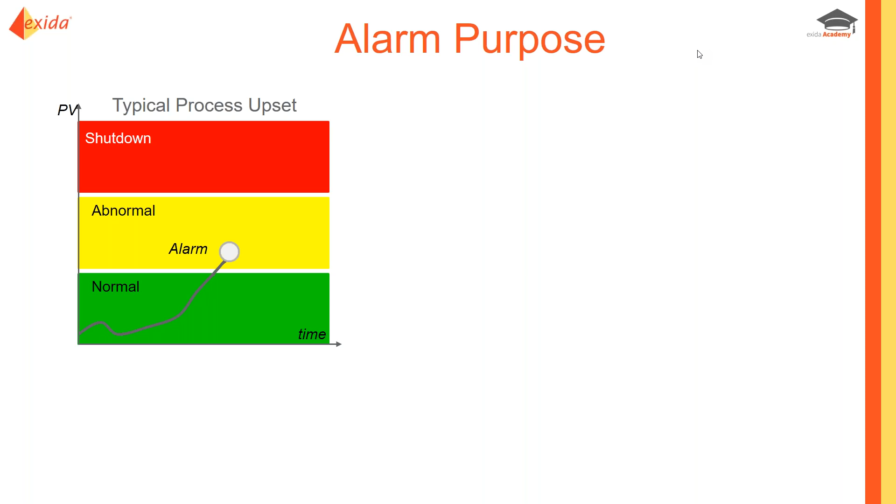Let's start with a discussion of what the purpose of an alarm is. In general, the process automation system will keep the process in the normal operating range, and at certain points when it gets outside of that range, we'll call it the abnormal situation area, that's when we need an alarm. And we want that alarm to go off to tell the operator, hey, I need your attention, I need you to take corrective action, and I need you to take that action relatively quickly to prevent an impending consequence. If the operator does that and performs the corrective action appropriately, then the process will turn around and go back from the abnormal situation area into the normal operating range, and the alarm will clear.

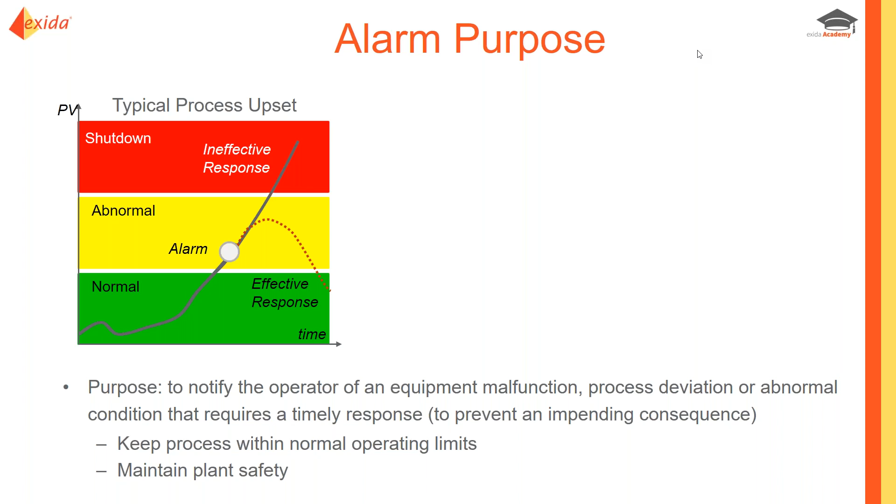If, however, the operator does not respond effectively, the process variable will continue to escalate until a consequence occurs, such as a shutdown of the safety system. So the purposes of an alarm also include keeping the process within normal operating limits. That would be keeping it in the green zone. And another way to think of it is alarms are also there to keep the process out of the red zone, out of the shutdown zone. Now, the scenario that we talked about with an alarm, it occurs, the operator responds to it, the process is corrected, the alarm clears. That's the way it's supposed to work.

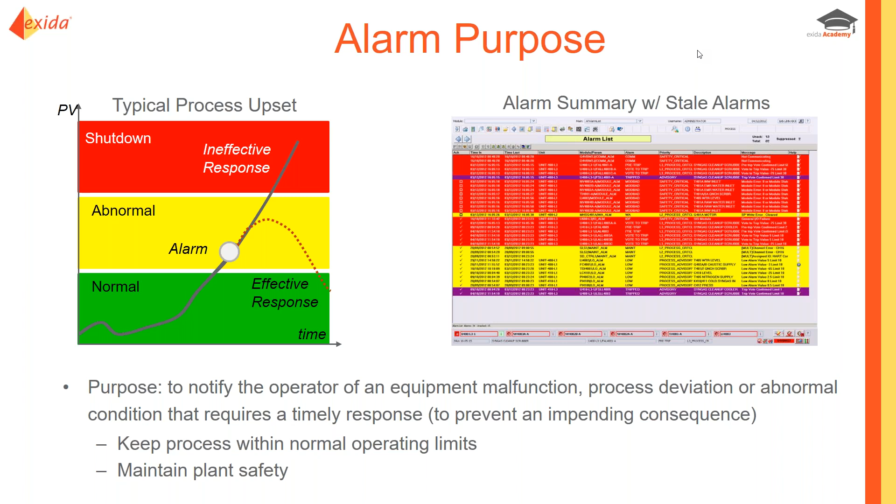But if you go into your typical control room and we look at the alarm summary display, we'll often see tens to hundreds of alarms displayed that scroll down and fill the page with alarms. And they may have been there for days, weeks, or months. So they're obviously not following the purpose of what an alarm is supposed to do. That's an example of a stale alarm, which gets in the way of the operator. Stale alarm is just one type of alarm management issue. Let's look at a couple more. We would be concerned about operators getting too many alarms, whether it's a steady state scenario or whether it's after an upset, and we'll call that an alarm flood.

We also should be concerned about nuisance alarms, alarms that are presented to the operator where they don't need to respond for one reason or another. Stale alarm is one example of a nuisance alarm. And then scenarios where the alarm priority is not meaningful in helping the operator understand the relative importance. If you have these kinds of problems in your system, then unfortunately you are robbing the operator of an effective tool or an important tool to help them do their job. The alarm system is critical for the operator to be able to do the best job that they possibly can.

Let's take a look at part of why that is. The key to operators performing well is to maximize their situation awareness. So what is situation awareness? It's the ability to take the external cues of what is happening in the process, including alarms, and understand what they mean now via the mental model, the understanding of the process. So what those cues mean now, and what they will mean in the future, or what that means to what is going to happen in the future.

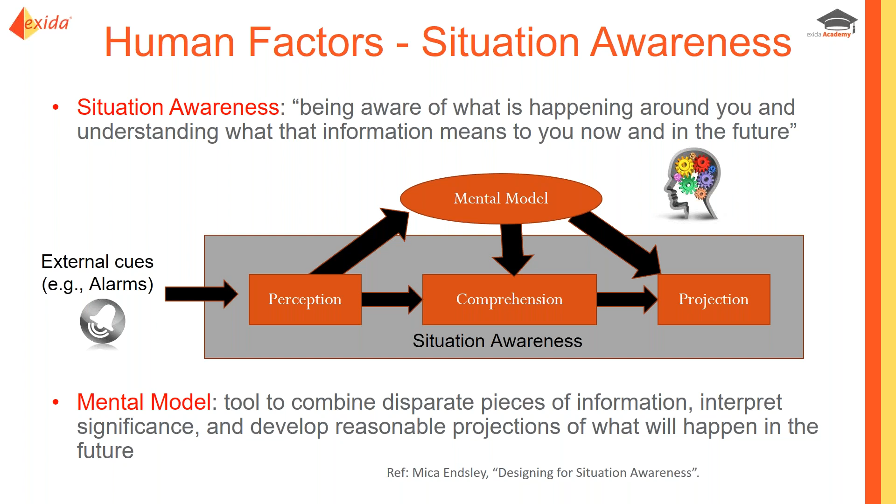So you can imagine that if these cues are false alarms, or are not meaningful, or mean the wrong or incorrect things, what's going to happen to the operator's situation awareness? It's really going to be compromised. And it will be very difficult for them to truly understand what is happening with the process, to do the best that they can, and to not make mistakes, frankly. If they're getting incorrect signals as to what is happening in the process, it's not hard to see that they might make a mistake because they've been given false information.

Another element that I wanted to point out and talk about were alarm floods. This is a scenario where the operator gets more than 10 alarms in 10 minutes, so it's a very difficult and challenging situation. That's generally speaking too many alarms to be able to respond to on a consistent basis. So it is very possible that the operator may get so many alarms that they can't understand and respond and process them all. So they could very easily miss one or more of those alarms, and if they were critical, it could ultimately lead to a shutdown or some form of consequence.

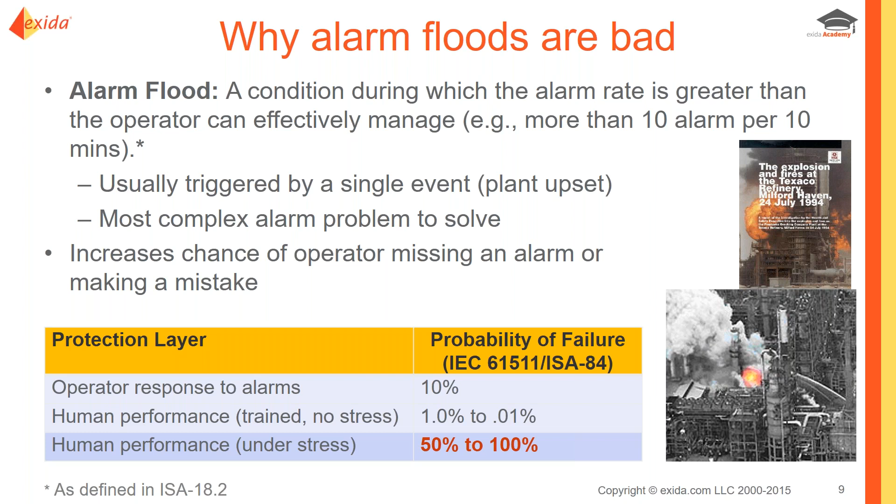So that's why we want to launch into an alarm management program. Now, the guidance for that program will be the standards on alarm management. In the US, the relevant standard is the ISA 18.2 standard, first released in 2009, updated in 2016. It was actually used as the basis of the international version of the standard, IEC 62682. Now, the two documents are very similar. I would say 80 to 90% of the content is the same. They both contain requirements and recommendations for what needs to be done.

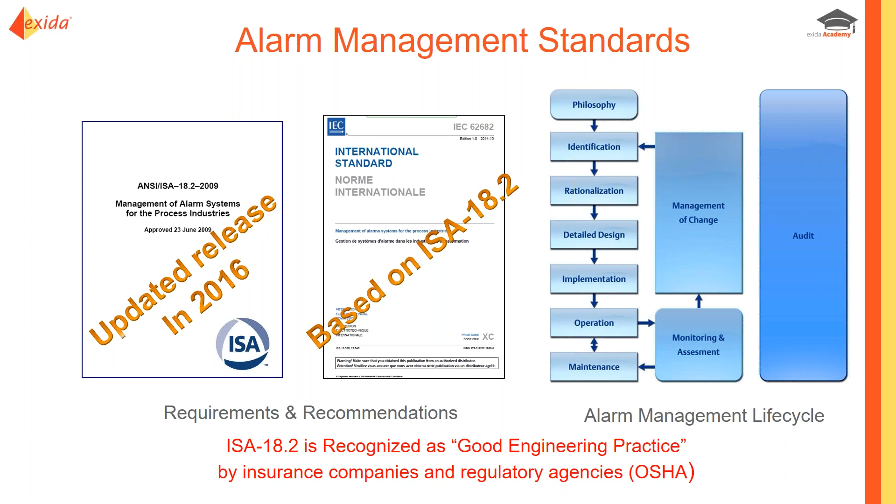They both contain the same alarm management life cycle, and that's what we see here on the right-hand side. This is essentially the alarm workflow practice. And what we're going to do is to essentially create an alarm management program out of that alarm management life cycle, or that conforms to that alarm management life cycle. We will use that as the basis. One of the other things that the standards do is they define the definition of an alarm, or the criteria for what an alarm is supposed to be. So let's look at that.

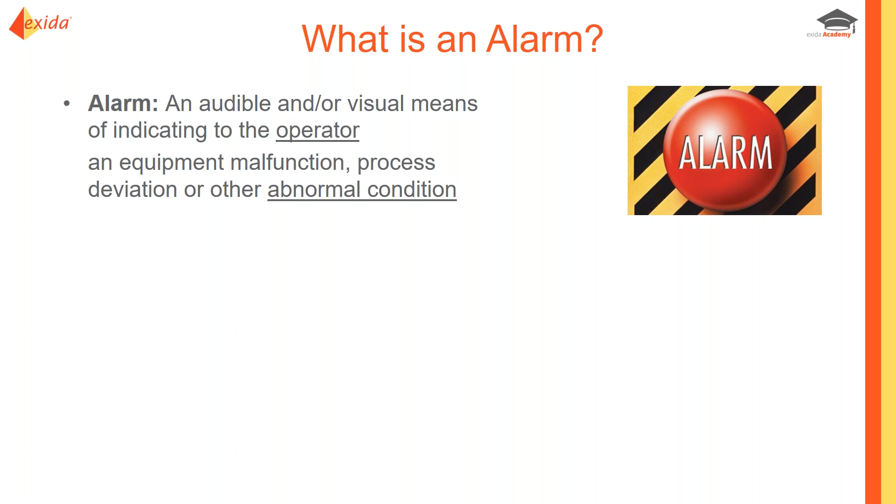An alarm is supposed to be an audible and/or visual means of indicating to the operator, and I've underlined the word operator to point out that the operator is the target audience for the alarm system. Second part of the definition is that an alarm needs to indicate an equipment malfunction, process deviation, or other abnormal condition. I have the word abnormal condition underlined to indicate that an alarm is supposed to indicate that something is wrong, something unexpected has happened.

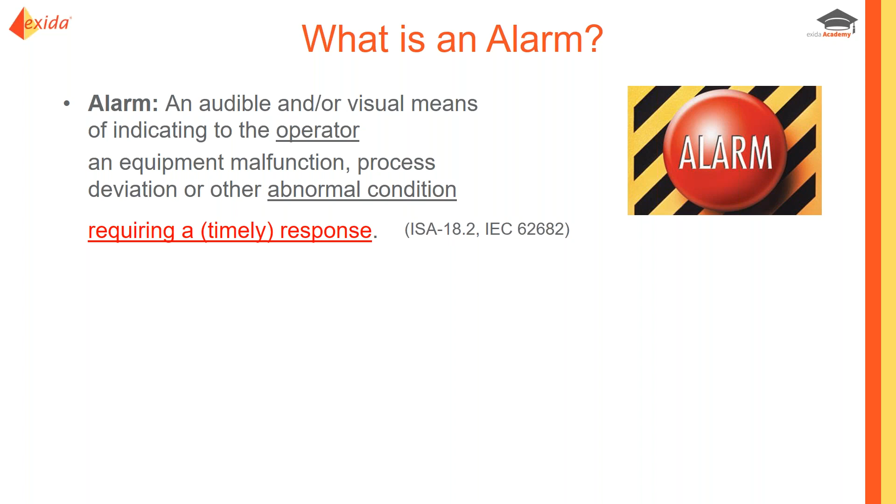And then last but not least, an alarm requires a timely response. More than acknowledging the alarm or silencing the horn, we're talking about opening a valve, turning on a pump, something that will actually correct the process abnormality. Now, there's a process that we're going to talk about in a little bit called alarm rationalization, and that's essentially the review of the alarms that you have configured or that you propose to make sure that they all conform with this definition. If you have an alarm system that has performance issues, it is likely because many of the alarms do not meet this criteria or this definition that we see here.

Now, one of the other reasons why folks have alarm management issues is they oftentimes use the alarm system to communicate everything that the operator needs to know, whether it's a true alarm or not. Part of what we want to do from a human factors point of view is to make it so that the alarm summary display, which is used for display of the alarms, contains only true alarm conditions, something that requires operator action and represents an abnormal situation. Now, that's not to say that these other types of notifications, alerts and prompts and messages and status indications, are not important. They are important as well, but alarms are more important.

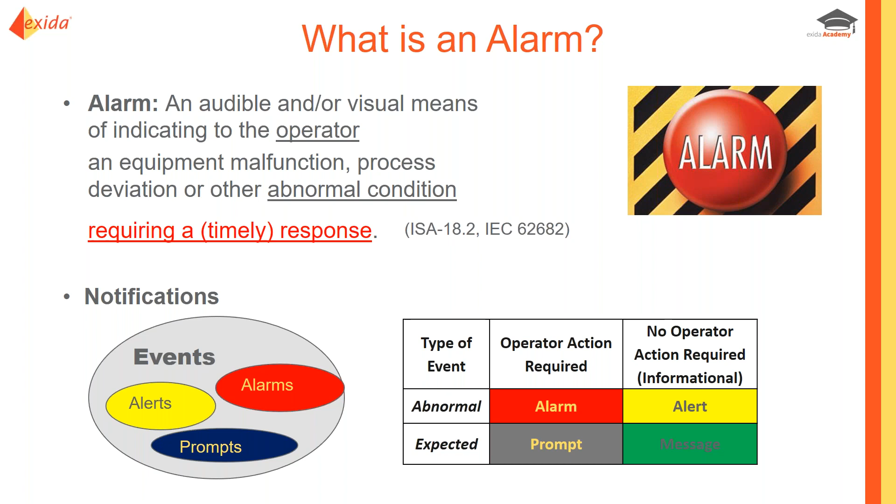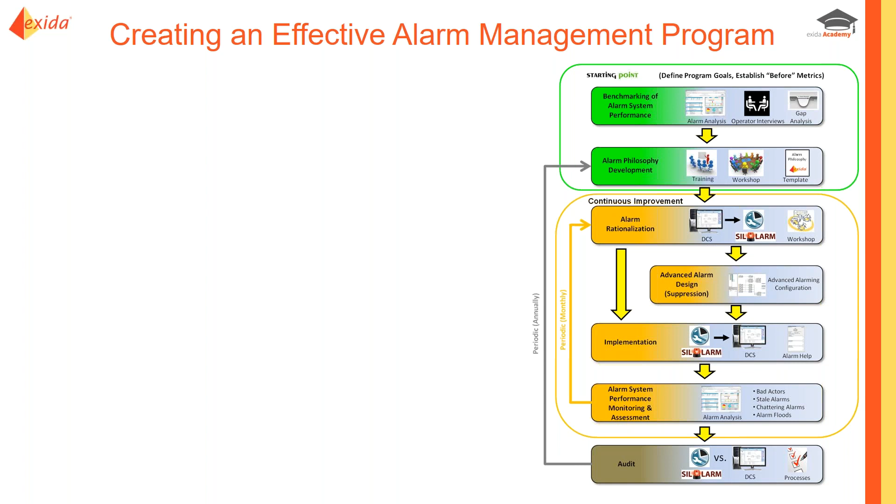So now let's turn our attention to how do we create that effective alarm management program. We saw the alarm management life cycle. Sometimes it can be a little confusing or challenging for folks to know where do I start or how do I drive action from that. So what we've done is kind of simplified it to create a 7-step process. The first step is to actually benchmark your initial performance. And that actually consists of, or is the same as performing the monitoring assessment step and the audit step of the alarm management lifecycle. But during this step of our 7-step process, we are measuring the alarm system performance to see how many alarms the operators are actually getting, how many nuisance alarms, that kind of thing.

We're also doing interviews to find out how well the alarm system works for the operator, and then we'll use that information to help us create an alarm philosophy document, which is the general guideline for how to do alarm management at your site. All things alarm management, whether it's configuration or processes and procedures. Once that's done, once the initial starting point steps are done, then you're ready to go into the continuous improvement portion of the process, and that begins with alarm rationalization, the review of the alarms to make sure that each one is actionable by the operator and has a purpose warranting it being annunciated to the operator.

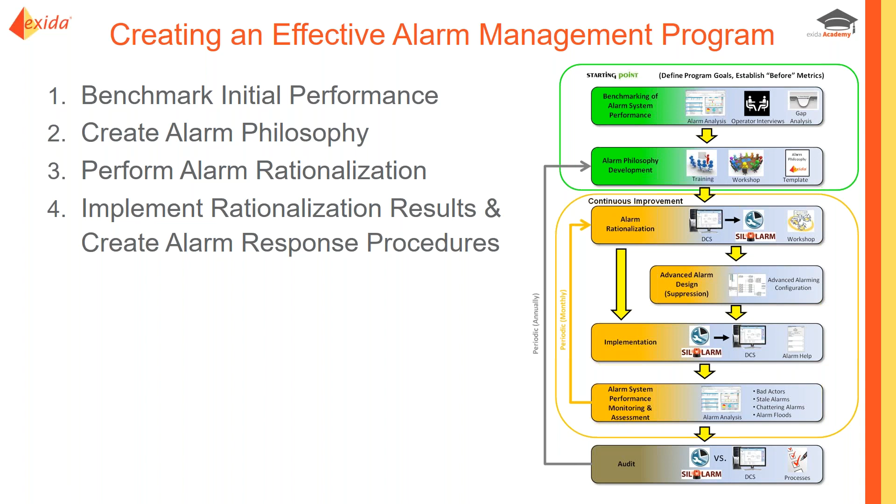After rationalization is complete, we want to make sure that we push the updated values into the control system and that we implement alarm response procedures. These are aids to the operator to help them know how to respond to the alarm. Now, in some cases, just performing alarm rationalization may not be sufficient to get rid of all of the alarm problems. So there may be another step required called advanced alarm design, which might involve implementing alarm suppression, for example. Sometimes this is referred to as dynamic rationalization, whereas the first pass of rationalization is referred to as static rationalization. And after that is done, then we launch into the, again, measuring our alarm system performance. And this is how we set up our continuous improvement loop.

So perhaps on a monthly basis, we measure our alarm system performance, see how we're doing, whether we're making things better or worse, identifying the currently worst performing alarms, which are then identified to go through the alarm rationalization process and get fixed. So you can see this becomes a continuous improvement process, and it's an ongoing process.

The last step in the program is to perform audits. This is a way to make sure that you're following the processes and procedures that you said you would in your philosophy document, and to make sure that the values of the alarm settings that are actually running in the DCS match up with what you defined during rationalization in your master alarm database. So it's maintaining the integrity of the alarm system.

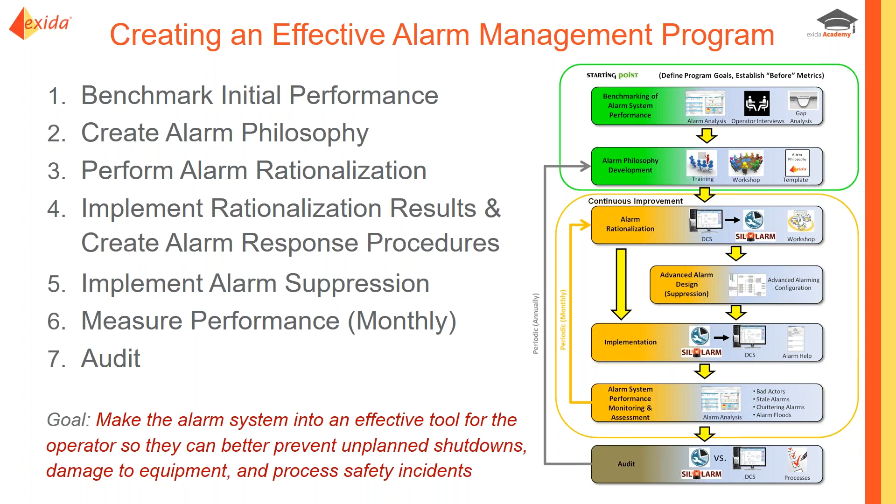So the whole purpose of this alarm management program is to make the alarm system back into an effective tool for the operator to deliver situation awareness so that they can better prevent unplanned shutdowns and damage and any kind of process safety incidents.

Now, one of the key takeaways from this webinar hopefully will be understanding the alarm management functionality that's provided by the different control systems. With the modern DCS, there is a lot of advanced alarm capability built in. And I would very much encourage you, if you have a running control system, to learn what capability is available. I would be willing to bet that there are alarm management functions that either you do not know about or have not implemented to their fullest extent that could help you solve some of the issues that you have. So hopefully this will be an introduction to some of those features, prompting you to go find out more.

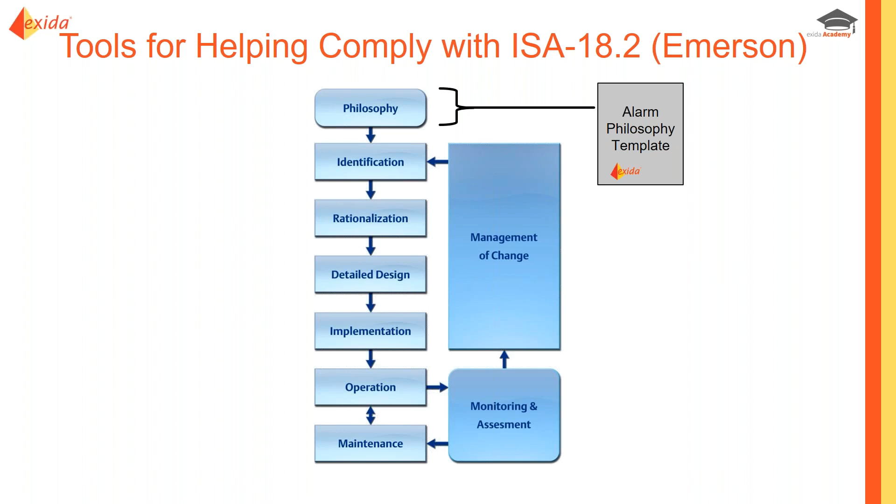Let's take a look at an Emerson DeltaV system. Now, to comply with the alarm management lifecycle and to create that alarm management program requires the use of some alarm management tools. We have an alarm philosophy template that we can use to help folks create that alarm philosophy document. I mentioned our SIL alarm tool earlier. That can be used for alarm rationalization and act as the master alarm database. Then the DeltaV system itself has very powerful alarm management functionality built in and available as options. So it's definitely worthwhile understanding what is available: conditional alarming, alarm suppression, alarm shelving, alarm flood suppression. So there's a lot of capabilities there that can be taken advantage of.

Now, one of the key parts to any effective alarm management program is this monitoring and assessment step. And pretty much you need a tool to do that. This is where we measure the actual alarm system performance, like looking at months of data at a time and calculating our KPIs. In a DeltaV system, this is performed by DeltaV Analyze, which can be supplemented by Cytex Excel Reporter for custom reports. To support management of change and maintain the system integrity, the SIL alarm tool can be used there, as well as DeltaV version 13 provides some runtime audit reports as well.

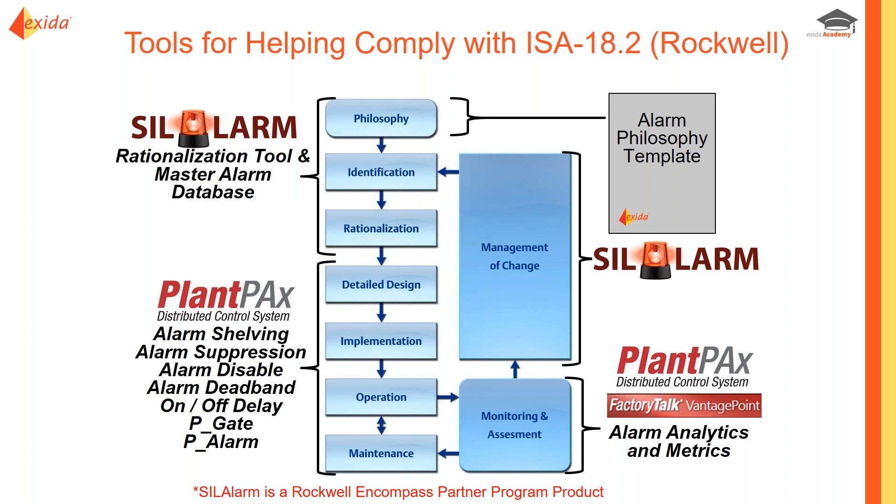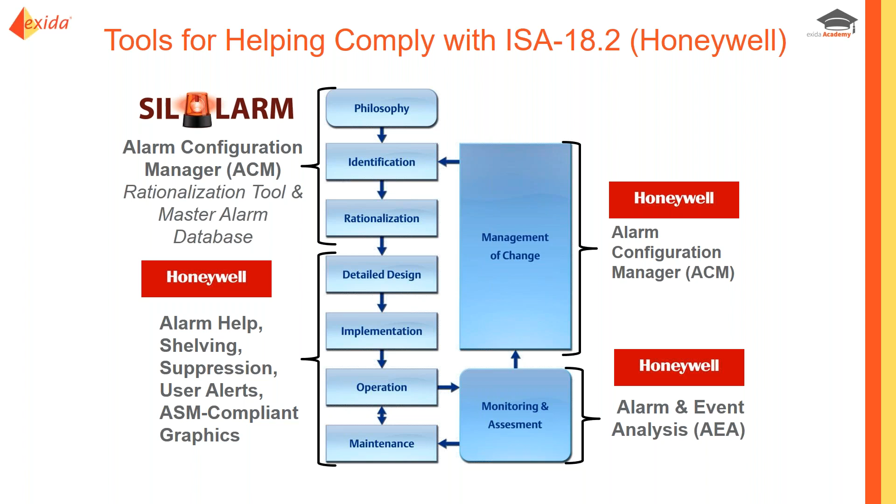For a Honeywell system, Honeywell provides capabilities and tools to meet these different functions. They have a tool called the Alarm Configuration Manager, which can act as the master alarm database. They also have alarm help and shelving and other capabilities, as well as a tool for performing the alarm system measurement called alarm and event analysis. So you can see that every control system kind of has their version of how to do different things, and it's continuing to innovate. Each year, the suppliers are adding new capabilities to comply with the alarm management standards and to make things better. So it's definitely worthwhile understanding what's available so that you can take advantage of it.

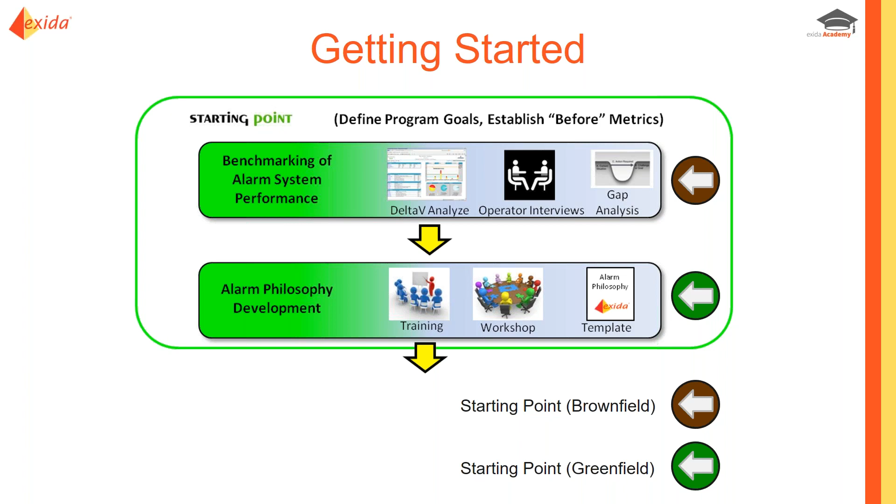So now let's talk about how to actually crank through our alarm management program. Let's start with the first two steps, really the getting started portion of the program. And here we are benchmarking the alarm system performance. That's what you would do if you were a brownfield. So this webinar applies to any different type of control system, as well as both brownfield and greenfield applications. So if you're a brownfield application, you start with the benchmarking step. If you're a greenfield application where you don't have a system up and running yet, then you would move directly to the alarm philosophy development step.

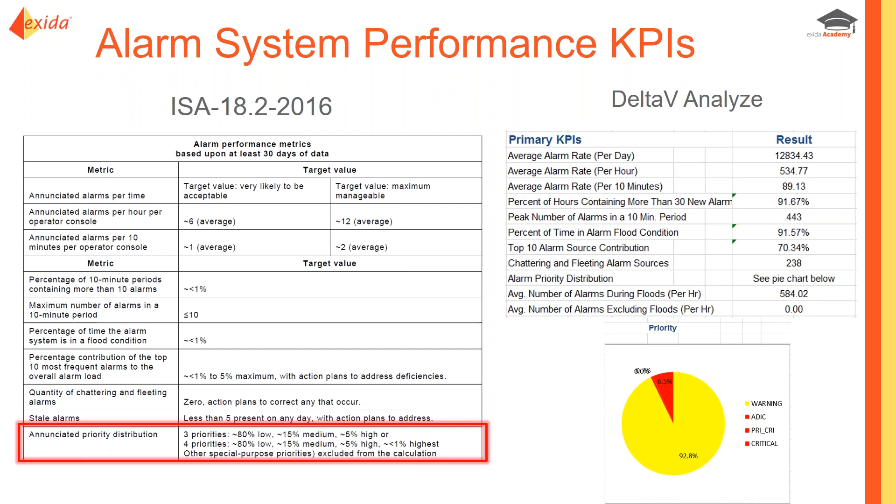So what we want is a tool that can calculate the actual performance of our system so that it can be easily compared to what's in the standard. Example, the number of alarms per 10 minutes, alarm flood conditions, top 10, and priority distribution. So we want a tool that can automatically calculate those KPIs so we can see where we are in relation to the standard. This will help us know how urgent it is to get this alarm management program started. It also serves to document our starting point for the alarm management journey.

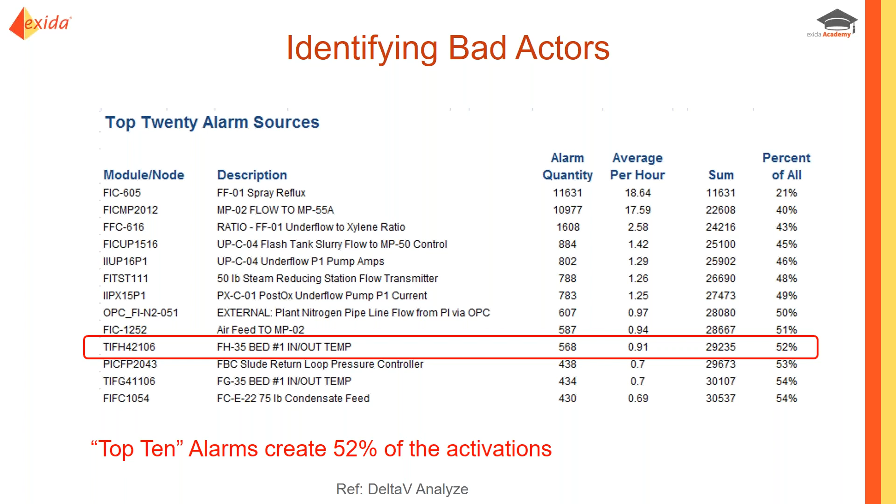Now, some people ascribe to the fact that the very first step, or believe that the first step is just identifying the bad actors and fixing them piecemeal. I personally believe that the bad actor identification and resolution should be included as part of the rationalization. So it's important to do, and it's beneficial to be done, but it should be done as part of the rationalization, not as an isolated step that you do before entering into a true alarm management program.

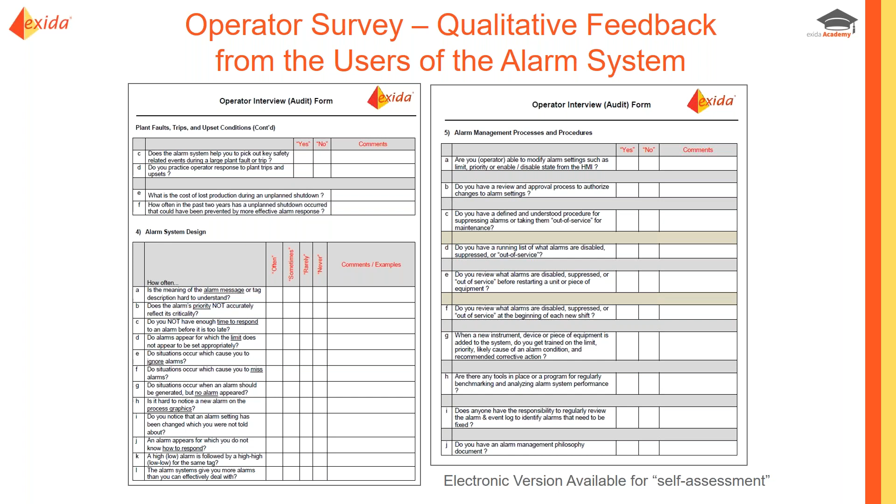Now that will document quantitative metrics. We also want to do qualitative assessments, determining how well the alarm system is working for the operators. There's many things that can be measured by a tool, but there are some things that you can only find out by talking to the operators themselves. Things like whether they understand the alarm messages that are presented to them and whether they know what to do when each of the alarms occur. That's important information to assess to help identify areas that need to be improved and to identify systematic underlying issues,

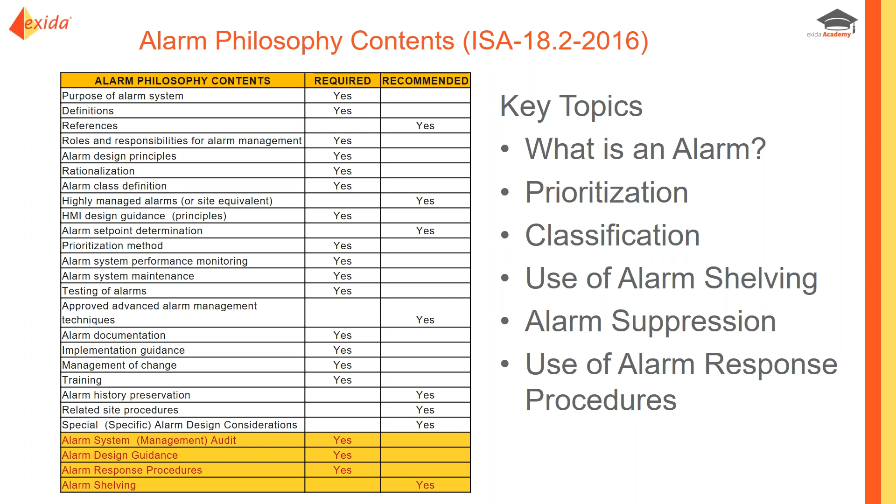Now you can see the content that's required or expected. This is what's defined in the ISA standard as what you should have in your alarm philosophy. If you have only seen the old version of the ISA standard, I would encourage you to check out the 2016 version, as it adds 4 new areas to go into an alarm philosophy. They're highlighted at the bottom here. And 2 of them are actually, well, they're all important, but we're going to talk about 3 of them during this presentation. So it's obvious that they really are important, and that is the auditing process, creation of alarm response procedures, and alarm shelving.

So as part of the alarm philosophy creation process, one of the things we want to do is define criteria for determining whether an alarm is valid or not.

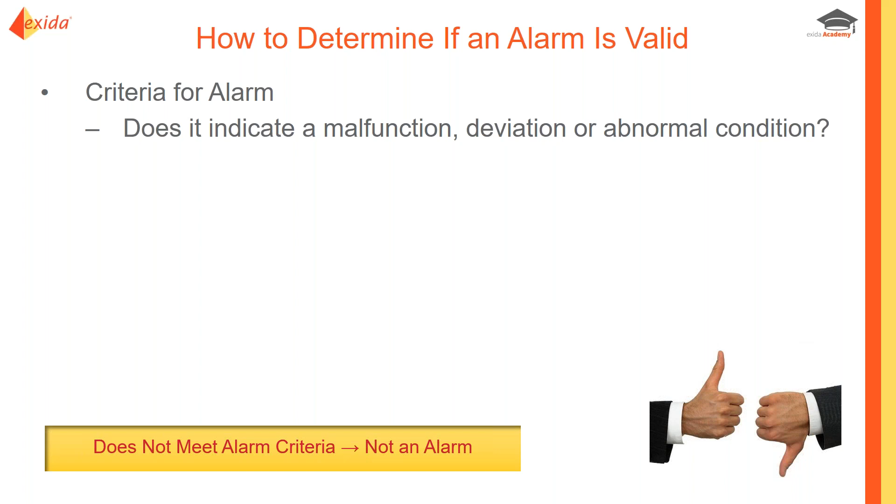And we can use the definition of an alarm to create criteria, such as what we see here. And the idea is that we want to create some criteria that can be applied simply and consistently to help folks quickly and easily determine whether something is a valid alarm or not. This will help eliminate the alarms that are for information only. It would help us categorize something as not an alarm, but perhaps an alert or a prompt or a message.

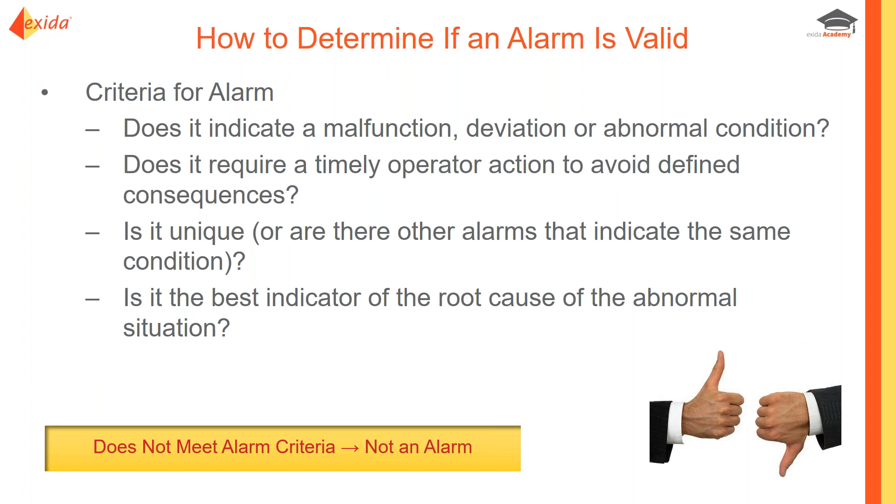But you can see hopefully that if you were to apply this criteria, it would help you eliminate some of the alarm management issues. We also want to define how to prioritize alarms. Alarm priority is what the operator should be able to use to assess the relative importance of an alarm, to help them know which alarm to respond to first.

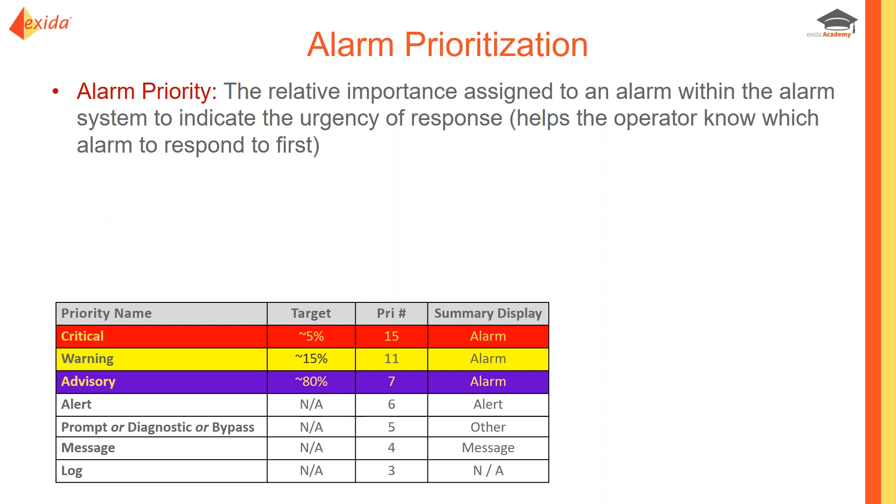In a typical control system, like a DeltaV system, there would be approximately 3 different process alarm priorities. There's really no need for more than 3 or 4 for the operator. And the idea would be the highest priority, in this case called critical, would have no more than about 5% of all the alarms. That means they would really stand out, and they would be few and far between.

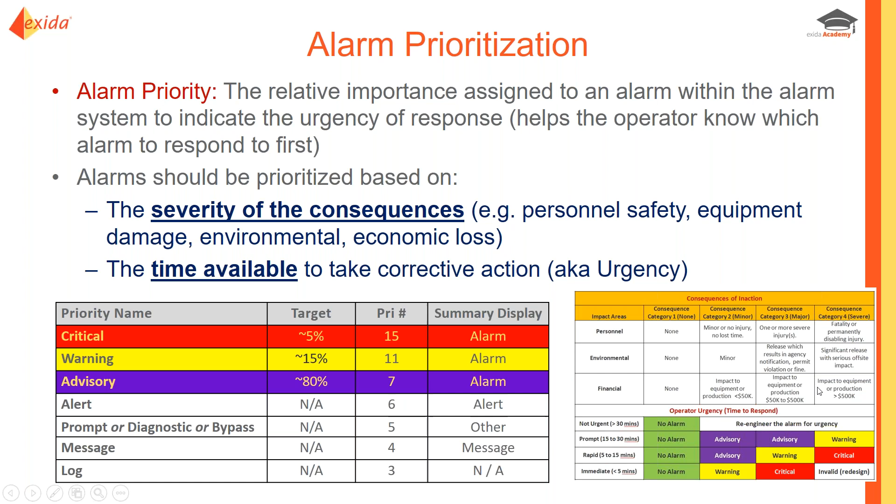And the idea is once this matrix is applied, when you have a critical priority and an advisory priority alarm at the same time, the operator knows that they should respond to the critical priority alarm first. And you can see there's truly a reason why, because the potential consequences of a critical priority alarm could be much more significant than an advisory priority alarm. So to drive the response in the operator that we want, we use this priority differentiation.

Now, one of the other things to address in the alarm philosophy is how to deal with scenarios where alarms are not working, or there are nuisance alarms, or other challenging alarm system scenarios. So this could be where a transmitter is connected to the DCS and it's in alarm, but it's not yet commissioned. So how do you deal with that situation today? Many people would just leave that as a nuisance alarm and it would become a stale alarm until it's commissioned. Well, we can do better than that now.

We can do better when it comes to malfunctioning hardware as well. Scenarios where the alarm and the hardware require maintenance. How do you deal with that today? How do you deal with alarms that are part of hardware that's being tested or calibrated? Or when an equipment or a unit is idle, is not being used, or is offline for maintenance and is generating alarms that are not meaningful at that point in time. Or after an equipment trip when the operator is flooded with alarms, or just nuisance alarm scenarios.

If you think about how you handle those scenarios today, in many cases, people are not doing anything special and they're making the operator just ignore the fact that there are stale alarms or nuisance alarms. And that makes it hard for the operator to concentrate. It ruins their situation awareness. So what we want to do is think about how to use the features in the modern DCS to do better than that, to make it so the operator can keep their focus on the most important things and not get distracted by a nuisance alarm.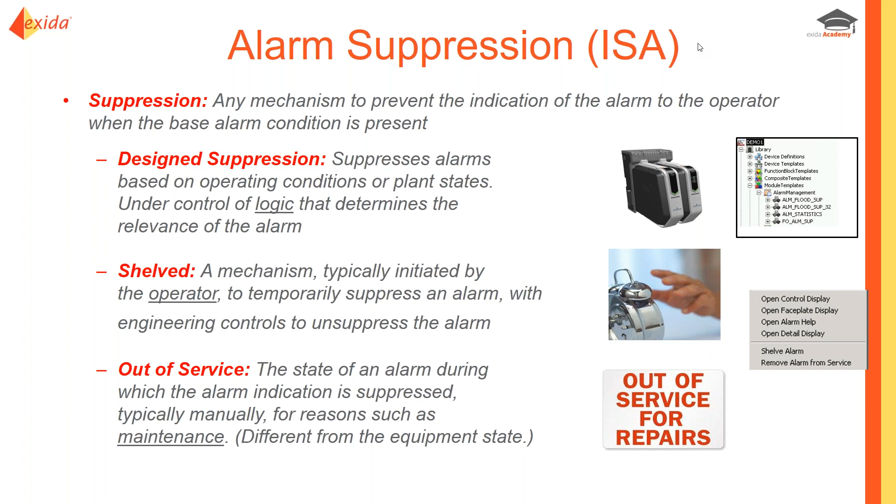That is when the system automatically detects the status of the process in the plant and then suppresses the alarms that the operator does not need to see when you're in that state. The second type of suppression is called alarm shelving. This is like the snooze button for the operator. It's a way for them to safely and securely suppress an alarm in a way that it doesn't get forgotten about. It will come back. It is only temporary. And then the third type of suppression is called out of service. This is when the alarm is suppressed indefinitely for reasons such as maintenance, for repair and replacement.

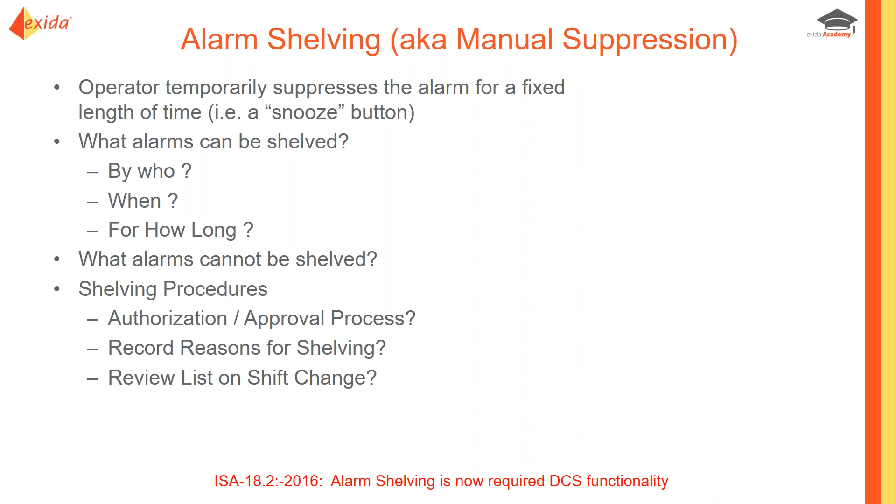So one of the important things is to talk about alarm shelving, whether you will use that or not and how you will use it. I've spoken with many end users that are hesitant to allow their operators to shelve alarms. Well, I believe that there is a time and a place for shelving, particularly if you have nuisance alarms. So during the development of your philosophy, you should think about when it's okay to suppress alarms. Under what circumstances and for what alarms.

You may decide that for your highest priority alarms or alarms that are related to safety, that they should not be able to be suppressed. And that would be fine if that's what makes sense from an operational point of view. But I do think it's important to be able to put this tool in the hands of the operator. It's actually a required function now of a DCS to be able to provide shelving capability. That was a new requirement that was added when the international standard came out.

And here we see an example of a DeltaV system where for each individual alarm, we can set the maximum time that the alarm is shelved or suppressed. So depending upon the type of the alarm or its usage, you could set the shelving time for 12 hours or 8 hours, one shift. You could set it for 1 hour, or you could set it for all zeros, which would prevent the alarm from being able to be shelved. So you can systematically define the shelving ability of each alarm.

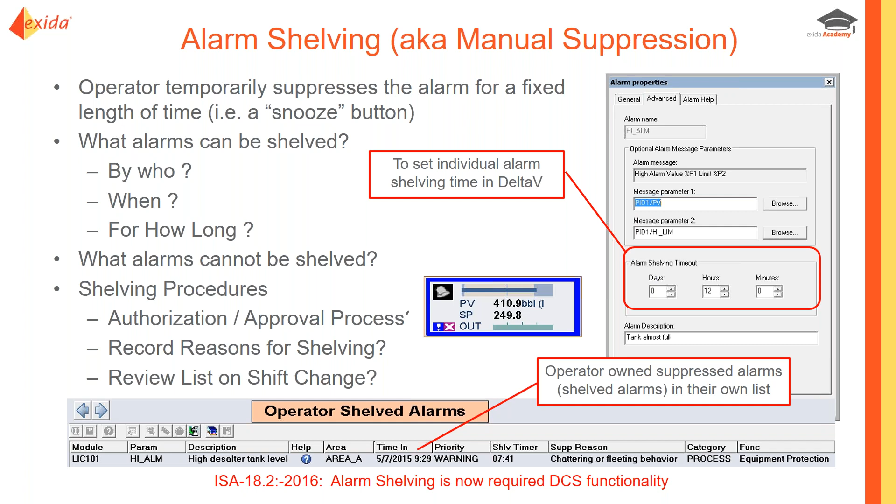We also want to make sure that the status of the alarm is visible to the operator within the HMI, and that there is a list or a summary of all the alarms that are shelved. And that list becomes pretty important because that should be something that operators are looking at as part of their normal routine during shift handover. So when they first start up their shift, to look at which alarms are shelved or suppressed so they know that going forward.

Now, continuing with the example of a DeltaV system, understanding the differentiation of shelving, which is the operator temporary suppression function, and the out of service function, which is the long term for maintenance, the way that's actually implemented in a DeltaV system, there are two different functions for that. And you can set up different access and control privileges so that operators have the ability to shelve an alarm, but not to take it out of service. And that would be reserved for a maintenance role or a supervisor role or an engineering role. You can also require that an operator indicate the reason for when they suppress the alarm.

Honeywell has a similar implementation of alarm shelving, similar but different functionality. So one of the key takeaways I hope that you see is you need to understand the functionality that's actually provided by the DCS before you dictate the requirements and a philosophy, because you may find that some of the things that you want to do you can't, or that you're not implementing or not leveraging the functionality that is provided. So in a Honeywell system, the operator actually gets to determine how long the alarm will be shelved for based on their selection of the reason for shelving. So different application, but again for the same function, alarm shelving.

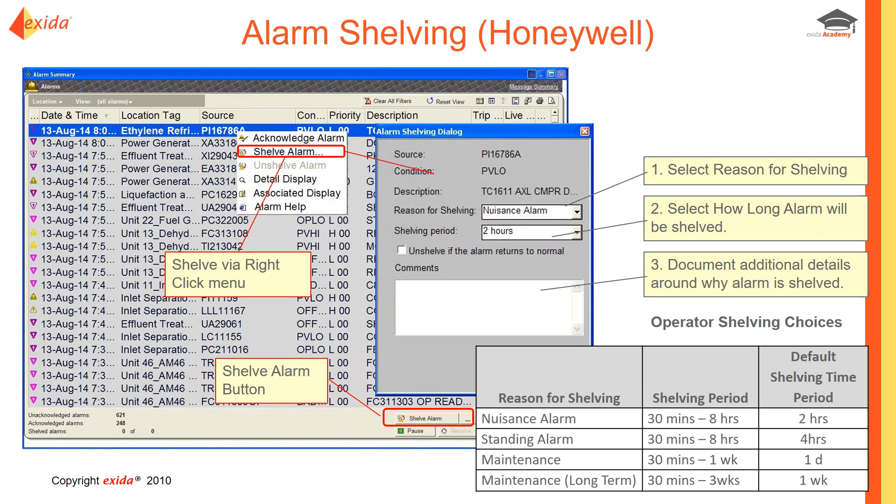In a Yokogawa system, alarms can be shelved for lengths of time between 1 minute and 24 hours. Now, the way this is set up, in the CAMS system, each alarm has the ability to be enabled or disabled for shelving purposes. And then in the configuration, we set up different shelves. And each shelf has a different shelving algorithm, whether it's a one-shot or continuous, and it has a different maximum amount of time to be on the shelf. So it could be 1 hour, it could be 8 hours, could be 12 hours, as well as different access control privileges.

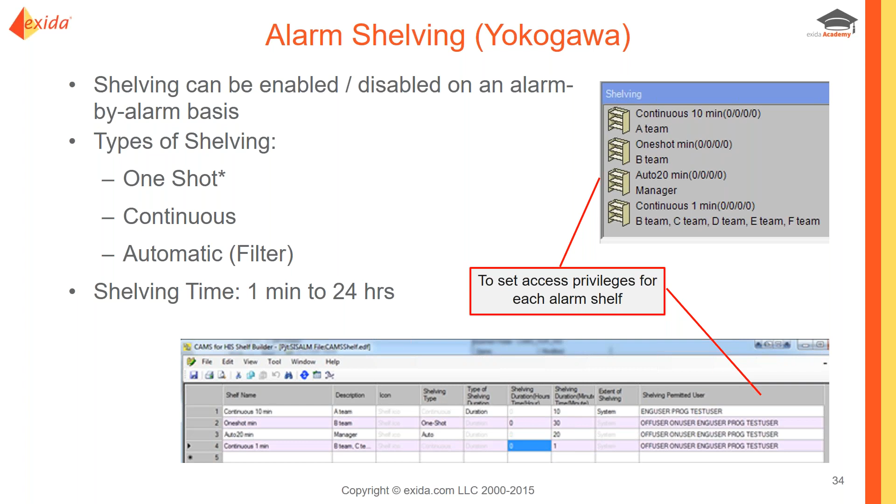So we could set up a shelf that's 24 hours, and that would only be for maintenance or supervisor, and 1 hour that would be for operations. So that's how it works in a Yokogawa system.

Now moving on to another part of the philosophy, defining alarm classes and classification. Classification is a way to group alarms that have common sets of requirements for things like training or testing or management of change. Examples include alarms that are for personnel safety or are safety-related alarms or for environmental purposes, or are associated with alarms that are called out in a layer of protection analysis used as an independent protection layer. But the whole purpose here is to ensure that alarms that have higher importance get treated with more rigor, or the appropriate level of rigor.

And one of the ways that that is differentiated is by the use of a concept called highly managed alarms. So whatever classifications you define, you can select 0 or 1 or more of them to be designated as highly managed. If they are, then there is a specific set of requirements, a prescriptive set of requirements that must be met as defined in the ISA standard.

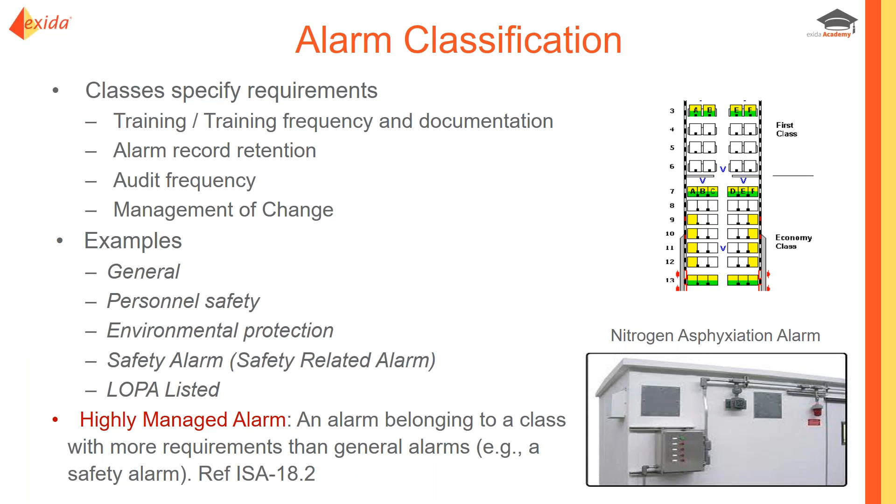So let's think about where that might be useful. And the alarms associated with a building that could have low oxygen, such that if the alarm indicating that didn't work and someone walked in there, there could be a fatality. That's a pretty serious and important alarm, and we would want to make sure that that alarm is tested very frequently, is not disabled without significant management of change review. So you can see that the processes for managing what happens with that alarm would be significantly different from your average process alarm, and that's what classification's for.

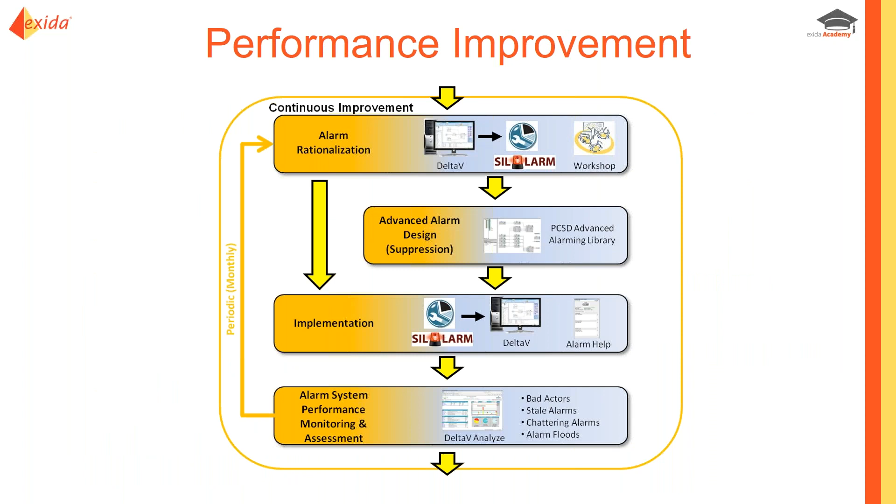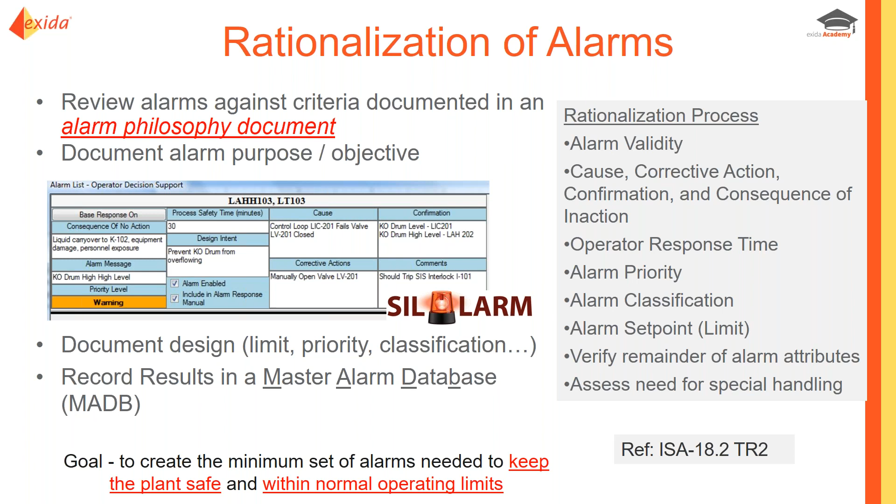So now we're ready to move into the performance improvement part of the program, starting with alarm rationalization, where we review the alarms to make sure that there's a true purpose for the operator to see them, and we document the results. Now, there is a process defined in the technical report number 2 from ISA 18, and it basically entails a number of steps, which we'll take a look at some of them, but the idea is this is a repeatable process that will help you determine the need for an alarm, the importance, its design information, its alarm limit, its priority, etc. And then you document that information in what's called a master alarm database.

So if we look at the first steps of rationalization, the determination of whether the alarm is valid or not, by looking at what is the consequence if the operator doesn't respond, what are the likely causes, what's the corrective action that the operator is supposed to perform. These are the key things that we need to think about to validate that the alarm is even needed, and we may also want to document the confirmation. So in this case, alarm rationalization becomes a knowledge capture process. If your most senior operators are taking part, then you are essentially documenting what they would do when the alarm occurs. If you document it in SILAlarm, then you can turn that into an alarm response procedure, an aid to the other operators that can be presented when the alarm occurs.

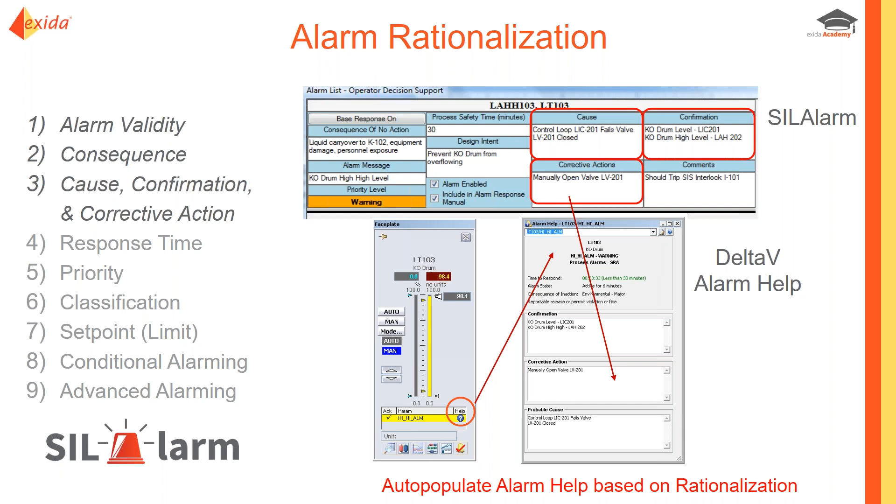And that can be a PDF that's called up, or many DCSs now can provide a window into that information, in some cases called alarm help. And here you can see the example from a DeltaV system, where we can actually take the information from rationalization and push it into these alarm help faceplates automatically, which means now when that alarm occurs, every operator, no matter how long they've been at the plant, gets the benefit of seeing what your most senior operator would do. So it's definitely an important activity to think about in conjunction with rationalization, and that is taking the outputs of rationalization and creating alarm response procedures.

So now let's look at some of the other steps from rationalization. We prioritize the alarm. We assign the ranking of the different consequence assessment areas, the amount of time to respond that determines the priority. We also review or document or determine what the alarm limit should be, and we're essentially trying to set the alarm limit in relation to the consequence threshold, which is the value of the process variable where the consequence occurs. So we can document that. We can document process dynamics associated with this, and we can use that to make sure that the operator has enough time to respond from when the alarm occurs to when the consequence might happen, or the last point in time before they can prevent the consequence.

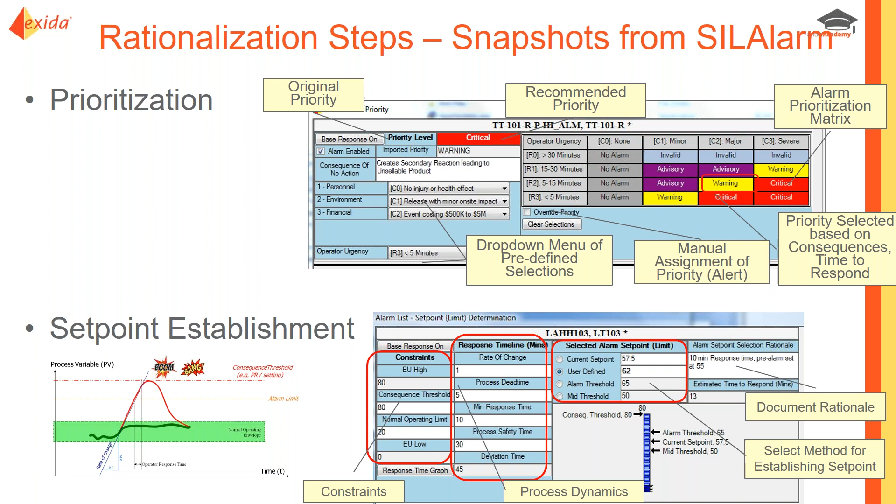So we can document that within the SILAlarm tool. And what's also important during rationalization is to document your rationale for why you set the alarm limit where you did, so that if someone wants to change it later, you can validate or evaluate whether that change is warranted or not. Another thing to determine or document during rationalization is scenarios that would result in consequential alarms, such as

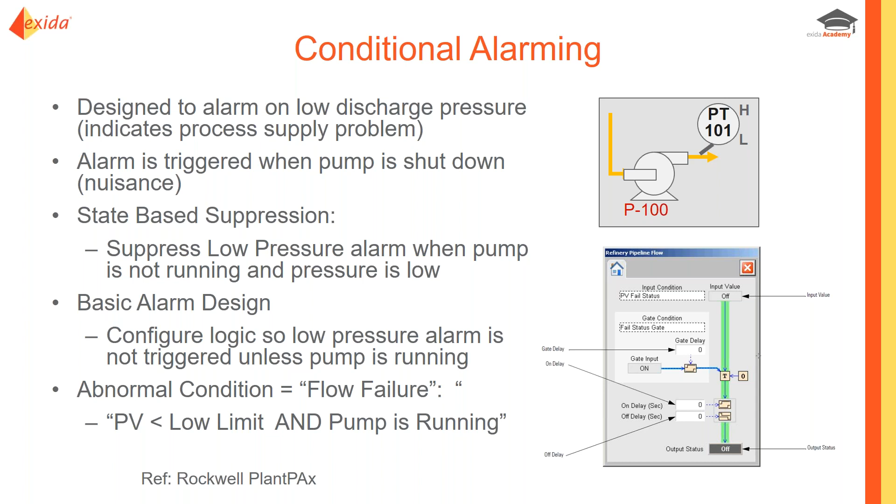a low discharge pressure alarm on the outlet of a pump. That alarm will occur anytime the pump is shut off. So knowing that, during rationalization, we could document the fact that we want to make that alarm a little bit smarter and not have it just annunciate based on the value of the pressure, but also based on the status of the pump, whether the pump is running. So we only want that low alarm condition to occur when the pump is running and the pressure is less than the low limit.

When we're all done, we've come up with and documented the design of the alarms that are necessary in the master alarm database. And here is the listing of what's expected and what's required to have documented as a result of rationalization. And that is in your master alarm database, which could be the SILAlarm tool, it could be an Excel spreadsheet, it could be an Access database, it could be a piece of paper. There's also other tools on the market for doing that.

And the benefits of rationalization, and part of the reason why you have operators take part, is so that they can see the changes that are being made and they can adjust the way they treat the alarm system. So they realize that no longer can they ignore the first alarm, expecting the second, third, or fourth and waiting for them before they respond. They will realize that, hey, we're only going to get one notification now, so we need to no longer ignore alarms. We need to respond the first time the alarm occurs.

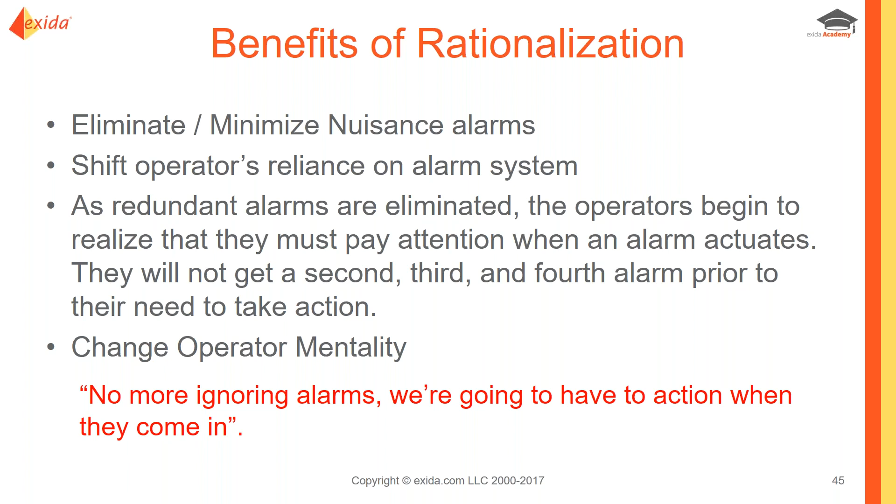Then the results of rationalization need to be pushed into the control system so that the changes take effect. In our SILAlarm tool, we can export that alarm information for taking into the control system, in this case the example being a DeltaV, and update all those parameters, including building those alarm help displays.

Now, the alarm response procedures, why would we want to create them? Well, if you put yourself in the shoes of a new operator, what would you want to know when an alarm occurs? You would want to know what has happened, what's going to happen if you don't respond. You'd want to know, what should I do? How much time do I have to respond? Things like that. How do I validate that this alarm is real? Those are the same things that we think about and talk about during alarm rationalization. So if we can document that, that becomes, again, very useful information to turn into an alarm response procedure.

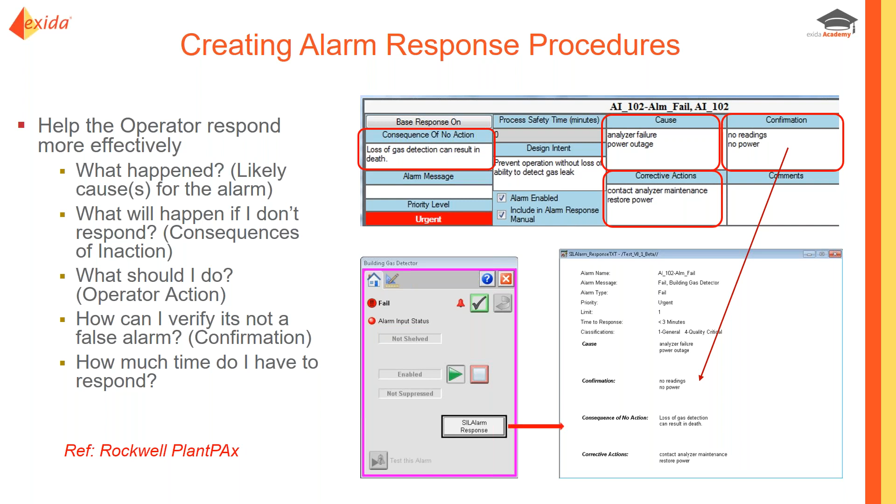So rationalization and implementing alarm response procedures will address many problems. However, alarm floods are very different from many of the other nuisance alarm type issues. And you may find that just performing that first rationalization, we'll call that a static rationalization, is not sufficient to address alarm flood scenarios. So we need to go back and do, in some cases it's called a dynamic rationalization, or we'll implement alarm flood suppression.

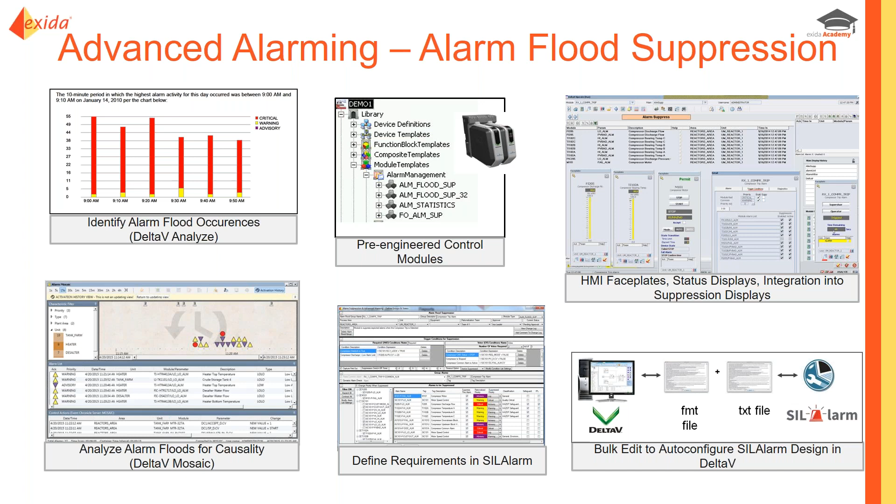So you want to look at what tools are available within the control system to help you identify when you're having alarm floods and helping to understand what's happening, the causes and the effects, so that you can then address that either through creation of alarm flood suppression schemes or using tools to look at statuses and update alarm statuses. So for a DeltaV system, as an example, when you are done your alarm rationalization and you're going to come back for your second pass, your dynamic rationalization, to suppress alarms during a compressor trip event, we can, in the SILAlarm tool, define our trigger conditions for when that suppression should take place.

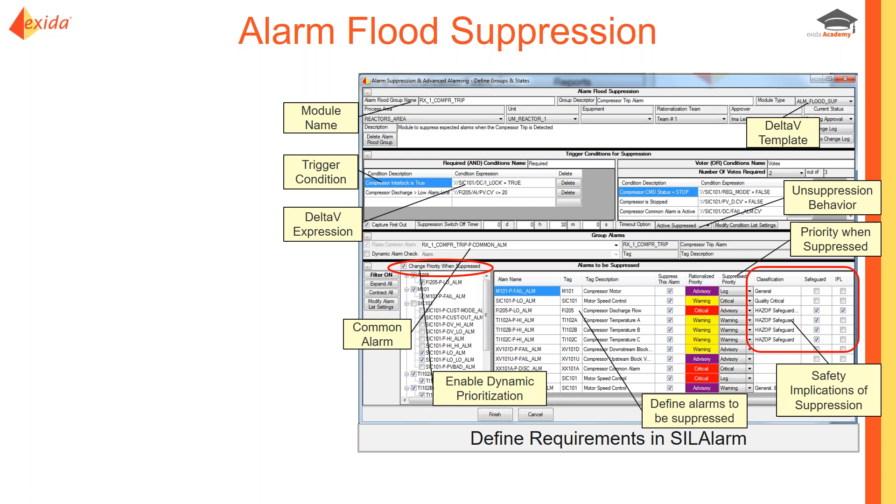We can define what alarms should be suppressed. We can define a common alarm. So everything about the operation or running of that suppression scheme or that suppression group can be created automatically within the DeltaV control system so that it runs actually in the controller, and also creates faceplates and status displays to indicate the status of the alarm suppression scheme.

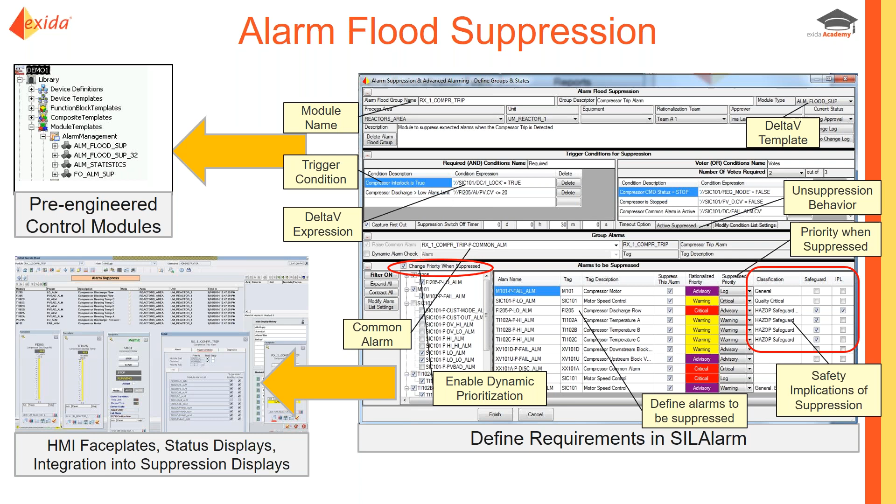So what alarms are suppressed, what conditions have been satisfied to cause that suppression, so that the operator always has visibility into what alarms are suppressed. We would not want to have alarms being suppressed and the operator not know about it or not realize that there are alarms that are not there because of that suppression.

Now, there are other ways of implementing suppression with other tools and in other control systems. Here's an example for a PCS 7 system where we're implementing the suppression in logic in the control system as well, detecting the state and using a unique function block or chart called a STATEREP block to indicate whether the state is active or not. That information can be used in the engineering system to say that when we are in a given state, such as the compressor has tripped, we can indicate whether the alarm should be hidden or whether it should be presented to the operator.

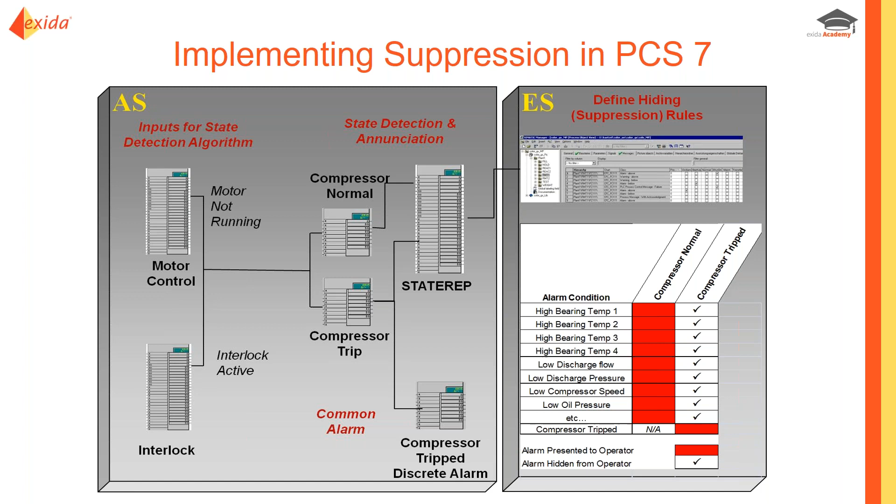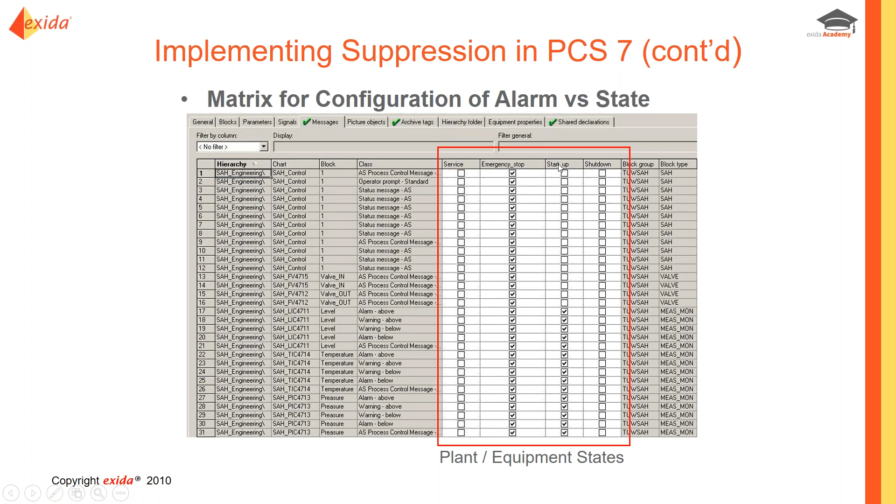So on an alarm by alarm basis, given the state that is detected, whether the alarm should be suppressed or not. Now that can be used for upset scenarios like a compressor trip, as well as for expected scenarios like you are starting up the process or you are shutting down a unit. So that can be used for both.

So now the last step in the performance improvement part is to measure your actual performance on an ongoing basis. So for example, monthly, you would want to perform the function to generate your alarm system KPI reports. How many alarms are the operators getting? Are you increasing or decreasing as a function of time? Hopefully you're reducing that. As well as there are many other reports that ideally you'd have the tool create automatically for you and email out to the people that need to look at it. So we're going to generate our KPIs, but we're also going to generate detailed reports to help us dive into events and understand scenarios to diagnose issues and fix them.

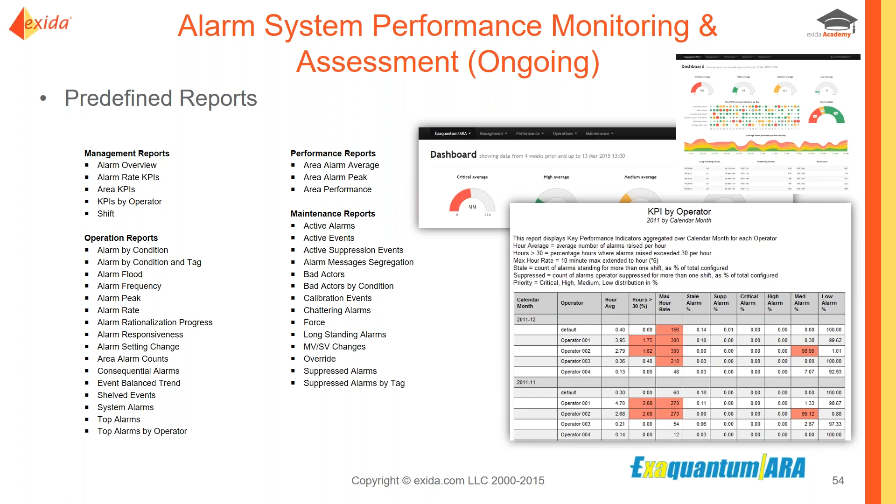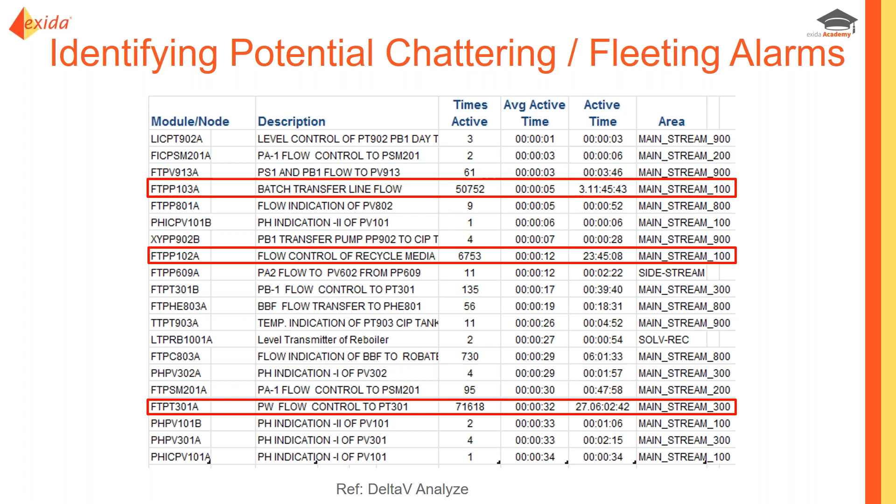So again, this is how we create a continuous improvement loop by identifying, in this case, chattering alarms, which would then be taken back to the rationalization process to review their design to see whether it just requires a simple implementation of a deadband or an on-off delay, or whether the alarm limit is totally set in the incorrect spot, or that the alarm is not even needed at all. So this portion of the program identifies alarms that need to be fixed, and we cycle back to that rationalization step. So another diagnostic would be stale alarms.

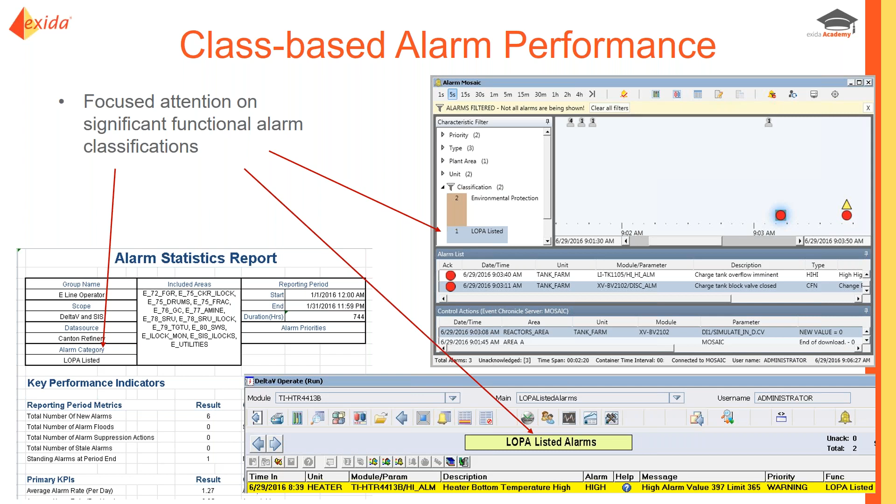Now for some performance assessment tools, a bonus is if the metrics can be calculated based on particular alarm classes or alarm classifications. It may be reportable to authorities the number of alarms or the instances of alarms that relate to environmental exceedances, for example, or safe operating limits exceedances. You may want to know the activations of your LOPA alarms to validate your LOPA analysis, your initiating event frequency, for example. So if your performance monitoring tool can calculate the metrics based on class, that can give you a very different slice or look into the control system performance for those particular, really critical alarms.

And the last step in the program is to verify or maintain the alarm system integrity. So one of the steps in there is to validate the processes that you're using and the procedures to make sure basically that you are doing what you said you would do. So if changing of an alarm limit requires a management of change activity be followed, then you want to verify that that's actually what's happening. And if it's not, then you want to investigate why so that it can be corrected.

And the correction could be an update to the alarm philosophy to say, hey, we can't do this or we don't want to do this anymore, so we update the philosophy. Or it could be, hey, we need to train people better on what the process is or what's expected of them when they want to change the alarm limit. So again, this is a way to help maintain the integrity of the process.

Now for maintaining the integrity of the alarm system configuration, that's where we want to do some audits of the alarm system configuration, the actual values of the alarm parameters that are running in the DCS versus those that are in your master alarm database, representing what you came up with from rationalization.

So we want to make sure that after you've put all this time into establishing what alarms should be enabled, what their priority should be, what their limits should be, that those aren't being changed without proper authorization in the control system.

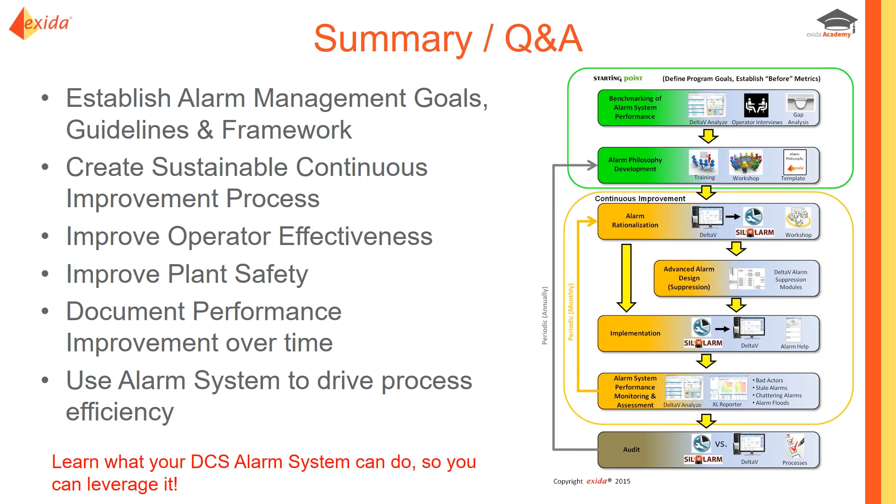There's a lot of powerful alarm management capability that will help you solve these alarm management issues that we all have. So it's incumbent upon you to find out what's available and then get assistance to help you figure out how to best implement that within your control system. So on that note, we draw our session to a close.